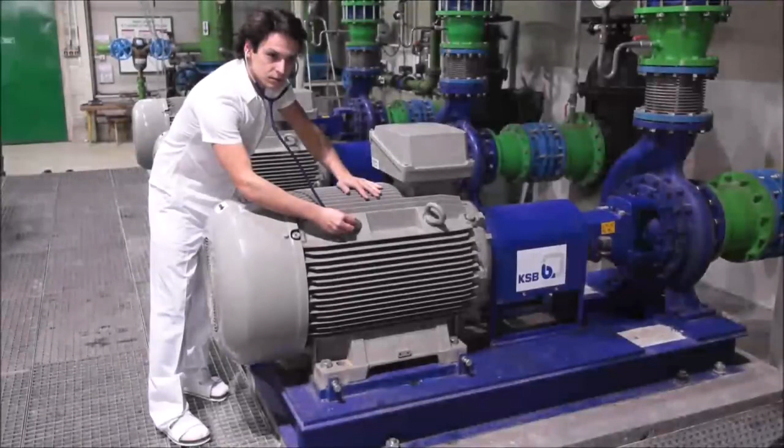Imagine that your acceleration sensor is like a stethoscope which your doctor uses to listen to your heart. It is basically able to monitor the vibration signal from the machine and show you the values of these vibrations on your vibration meter or analyzer.

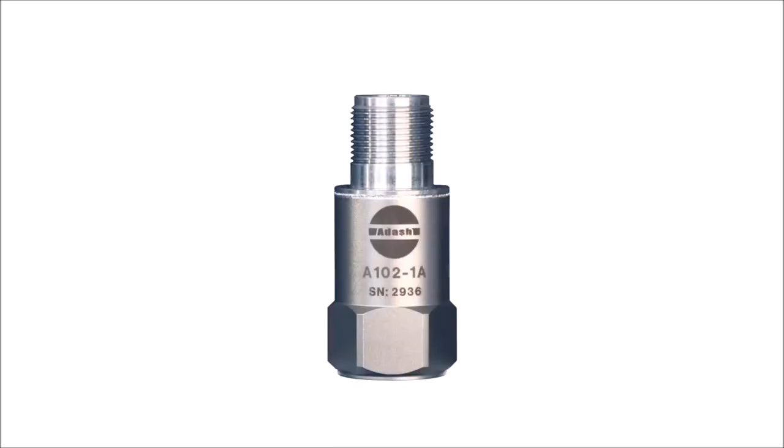The most commonly used acceleration sensor in industry is a piezoelectric acceleration sensor. It is an electronic device which in a very simple way looks like this inside, and like this in reality.

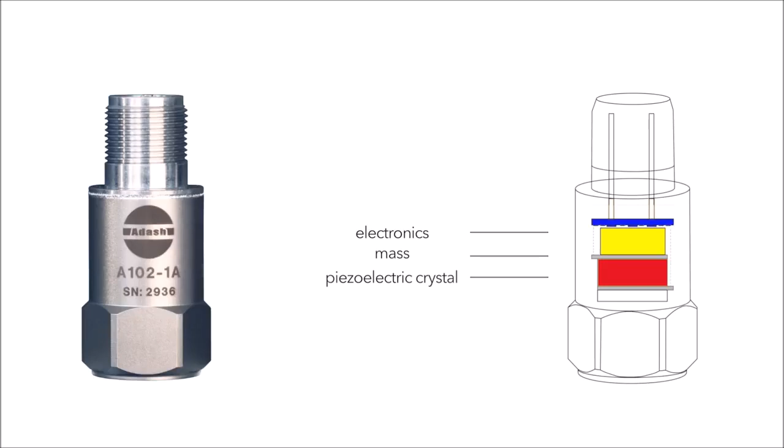A piezoelectric crystal generates an electric charge when it is deformed, meaning compressed or stretched. To ensure deformation of the piezoelectric crystal, you can see that there is some preloaded mass on it.

The electric charge is transferred into the electronics of the sensor, where it is converted to voltage. This voltage is then transferred into your vibration meter through the sensor connector and cable.

In other words, the sensor is shaking on the running machine. The preloaded mass is deforming the piezoelectric crystal, and this generates a voltage signal on the output of the sensor.

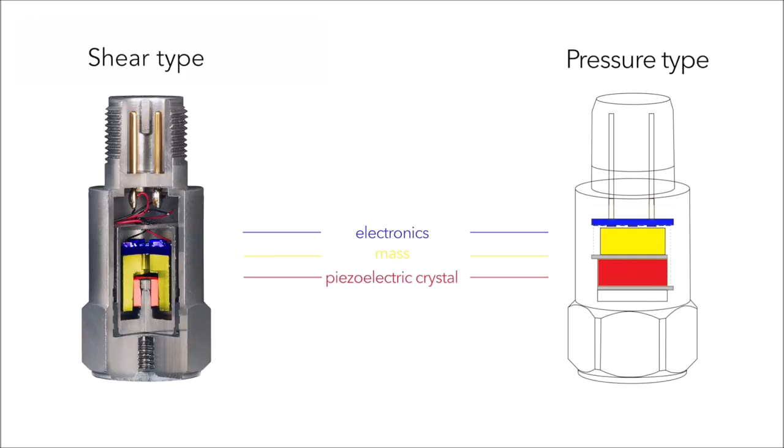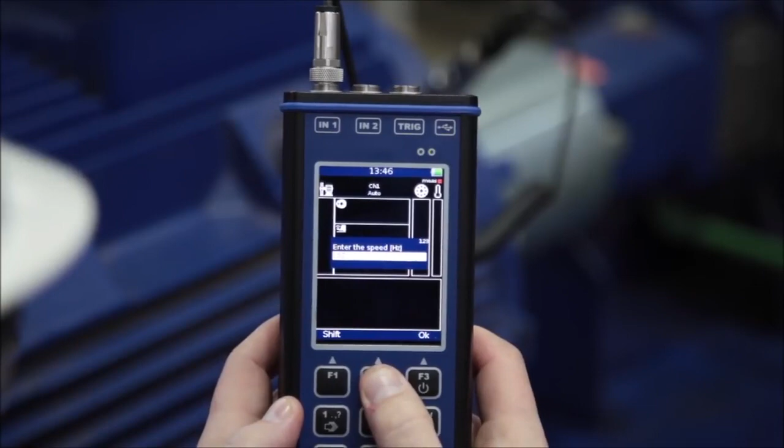A vibration meter or analyzer is an electronic device which is able to process vibration signals. If we think about it again in a very simple way, imagine that your vibration meter or analyzer is a voltmeter. The sensor is generating a voltage signal while it is shaking on the machine.

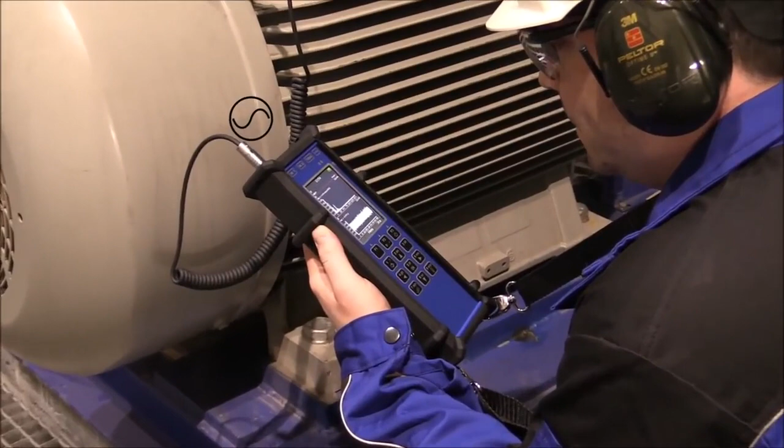This voltage signal is transferred through the cable to your vibration device. But your vibration device will not show you volts. It is smarter than that voltmeter.

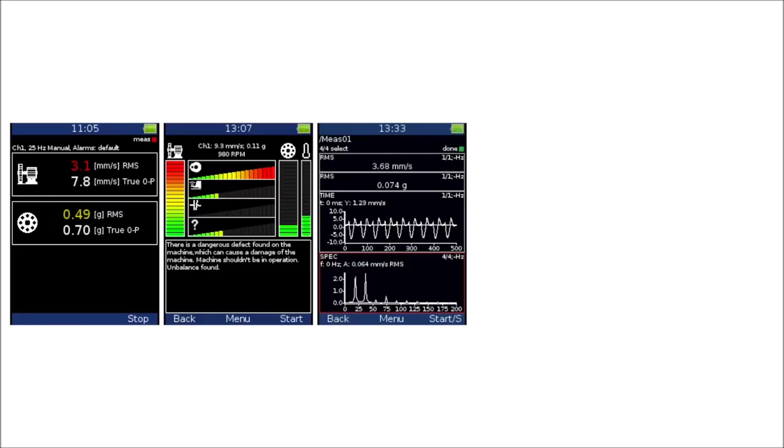The vibration device is able to process the voltage signal and display vibration values such as acceleration and velocity. We will describe vibration values in our next video.

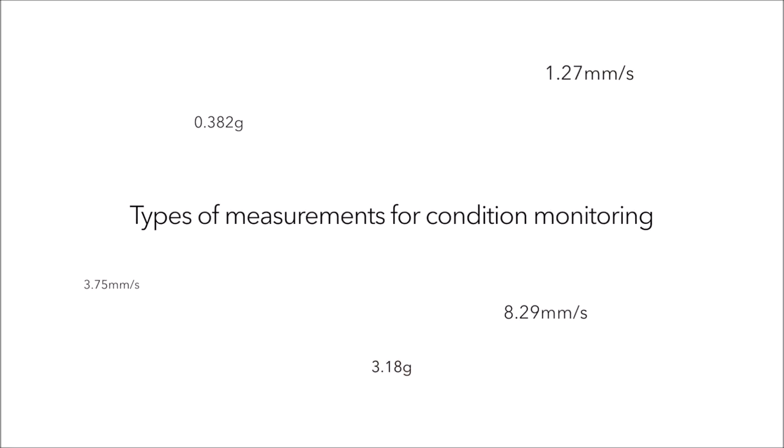The most common question about measurements is, what should I start to measure and what do these numbers tell me? Is it a good number or a bad number? What are acceptable vibration values for my machine? What are the limit vibration values which my machine should not exceed?

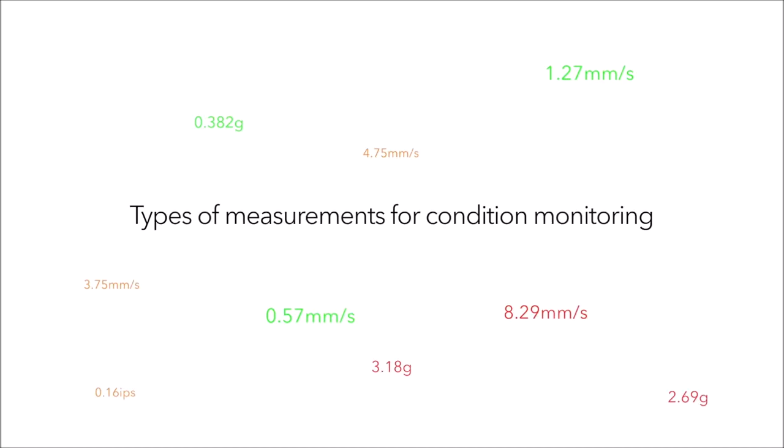Let's go back to low frequency and high frequency vibrations and talk a bit about vibration limits. There are some limit vibration values which can be considered as values indicating a worsening machine condition. We can set up the limits according to some experience with certain machines.

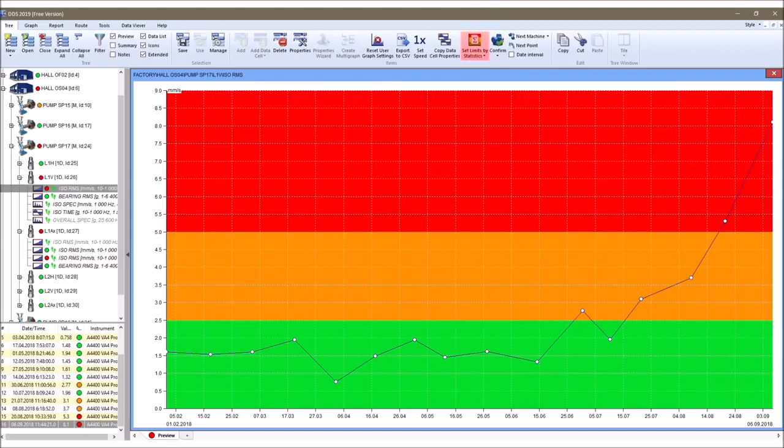There are also, for example, Adash and ISO 10816 standards for those limit values. Or the Adash DDS software can set up the limits automatically based on statistics from the previous measurements.

All mechanical faults which are related to the speed of the machine, such as unbalance, misalignment and mechanical looseness, are considered to be low-frequency vibrations. These vibrations are measured as velocity in millimeters per second or inches per second.

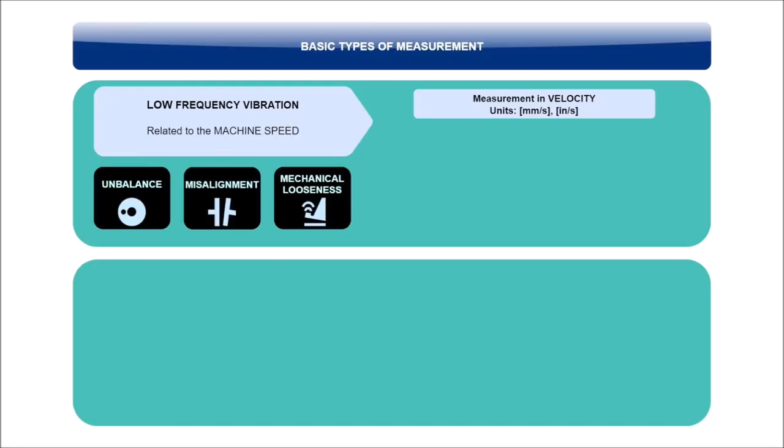Maybe you are asking now how you can measure velocity with an acceleration sensor. With an acceleration sensor, you can measure an acceleration value, but the meter, the analyzer, can convert the value to the velocity value. The most common frequency range of this measurement is 10 to 1000 Hz.

This frequency range is also applied on ISO 10816 standards. These standards take into account the size of the machine and its foundation.

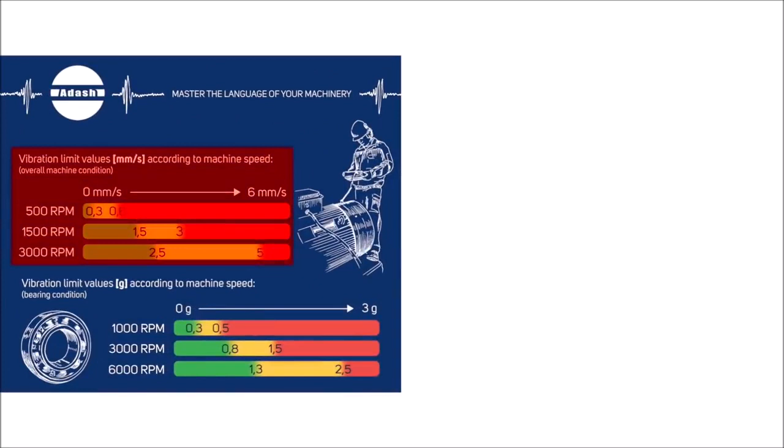Adash has defined vibration limit values which are related to the speed of the machine, not to the size of the machine. The frequency of 10 to 1000 Hz is also applied.

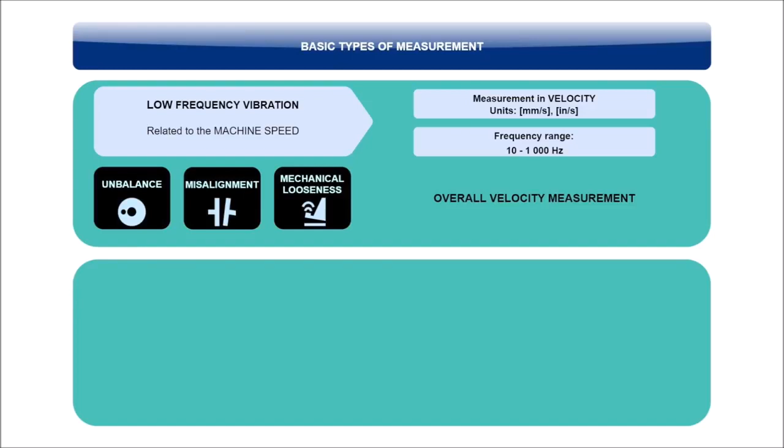This way, we came to the conclusion that to monitor mechanical vibrations related to the shaft speed of the machine, we will use the measurement of overall velocity in millimeters per second, or inches per second, in the range of 10 to 1000 Hz. This measurement is represented by one number. Using the Adash DDS software, we can trend this value in time and see its development.

A specific part of the machine which we want to monitor is a bearing. Bearings, as well as gears, generate vibrations on higher frequencies due to their construction and their natural frequency. These vibrations are measured as acceleration in a G value.

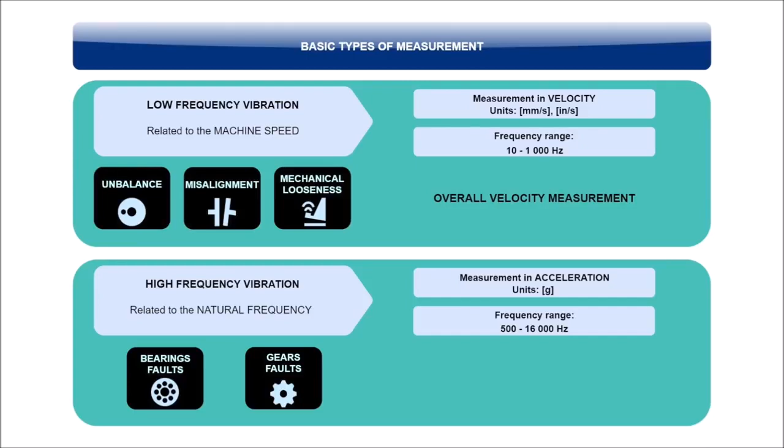The frequency range of this measurement may vary a lot, and you should find out what would be best for your particular bearing. But let's keep it simple and define your measurement of acceleration in the range of 500 to 16,000 Hz. Adash has defined bearing vibration limits related to the speed of the machine again. The mentioned frequency range of 500 to 16,000 Hz has been applied.

Even if we have Adash bearing vibration limit values, they are just informational. These limit values were created on the basis of more than 30 years of experience of Adash field engineers.

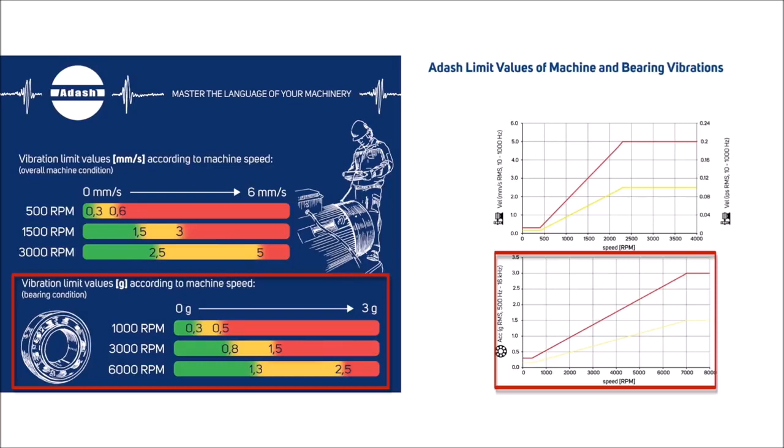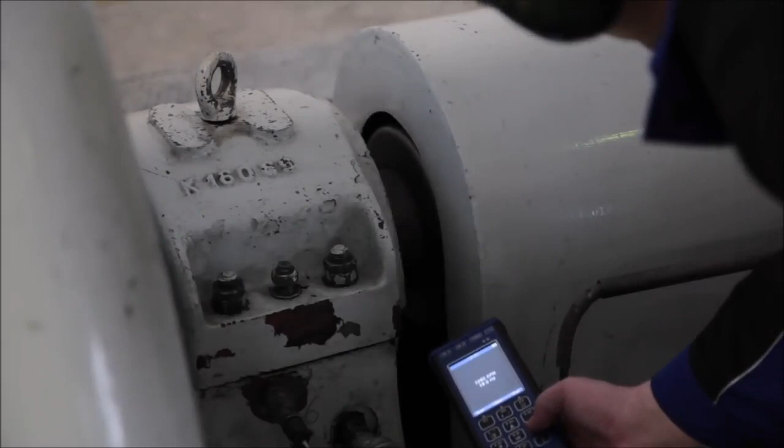Why do general bearing vibration limits not exist? As you can imagine, there are many thousands of bearing types on the market. Therefore, you cannot define general vibration limits. Also, you have to consider that each bearing on a particular machine runs under a different speed and a different load. Another aspect is how the bearing was installed in the machine.

So, the second measurement, which we will include in our regular machinery measurement, will be overall acceleration in G, in the range of 500 to 16,000 Hz. It is represented by one number. Again, using DDS software, we can trend this value in time and see its development.

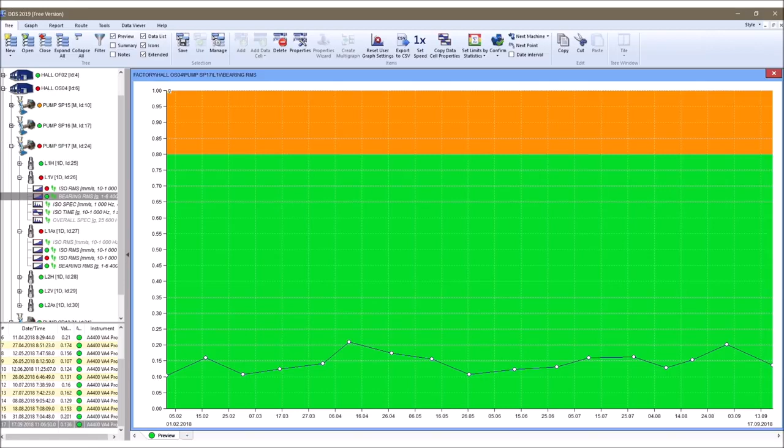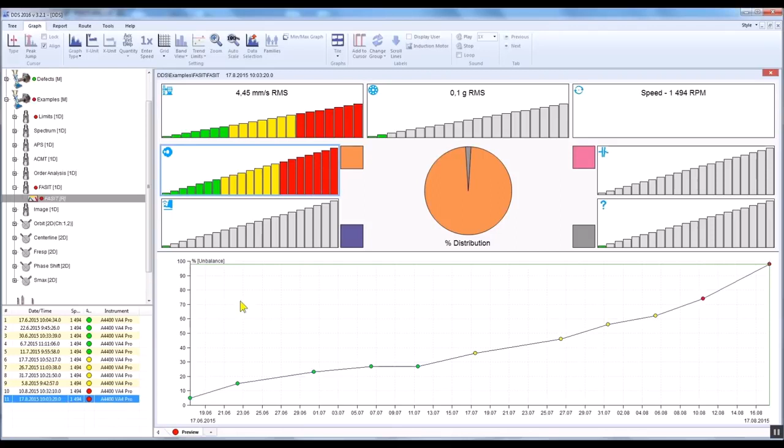The Adash FASIT feature offers a very user-friendly approach to basic measurements. This type of measurement automatically measures in one step not only overall velocity and overall acceleration, but also the severity of individual machine faults, such as unbalance, misalignment, mechanical looseness, and bearing faults. All values are based on Adash limits.

So, for a quick summarization, there are two important values which we should measure regularly on our machines. Overall velocity in millimeters per second, or inches per second, the lower frequency range, which indicates the general machine condition. Overall acceleration in G, the higher frequency range, which indicates the bearing condition.

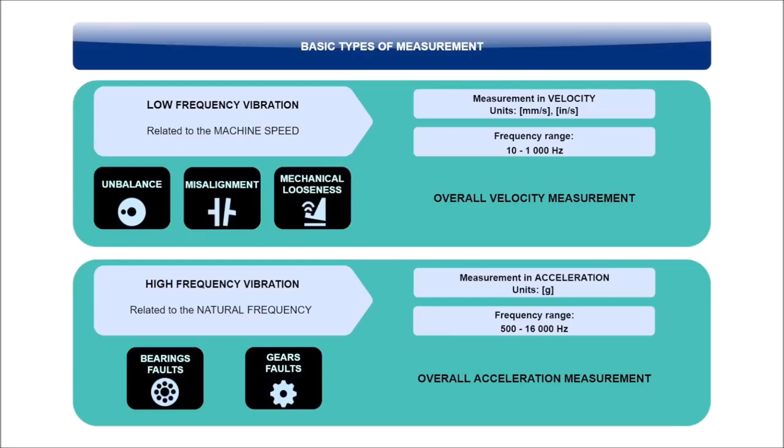Maybe you're asking why we use different units, velocity and acceleration, for those measurements. Put simply, acceleration is more sensitive to high-frequency vibrations, and velocity is more sensitive to the lower frequency range. So it has become common to use those two units as they are the most effective for vibration diagnostics.

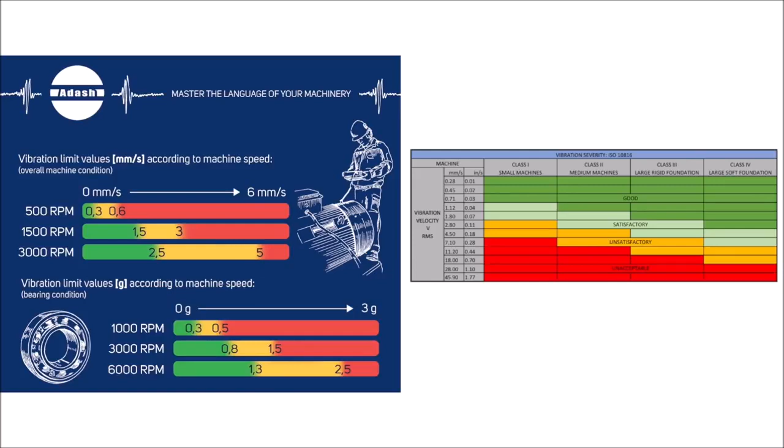Whether we use ISO or Adash vibration limit values, they are just informational. You should always try to find out what the vibration limit values for your particular machine are. In other words, to find out what the optimal operational condition of your machine is. You can do that by measuring and comparing more machines of the same type, running at the same speed and under the same load, or you can ask a vibration diagnostician who should be able to make a deeper analysis of the machine and tell you if it is running under its optimal condition.